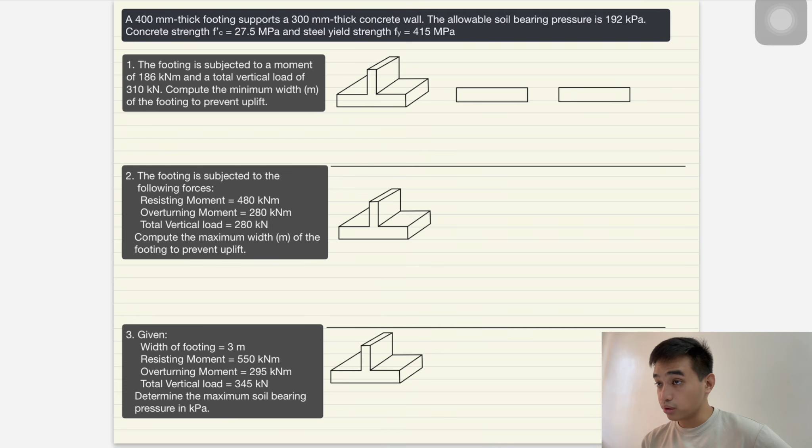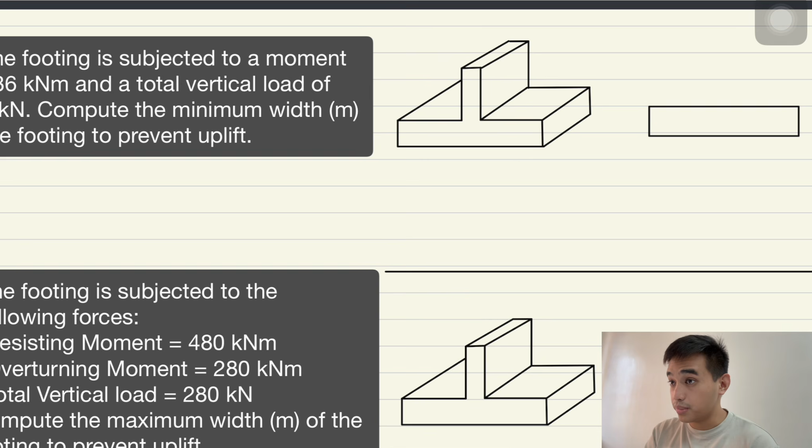So in our problem, uplift is mentioned. What is uplift? Uplift is when the pressure diagram under our footing exhibits tension forces. So how do we identify what our pressure diagram under the footing looks like?

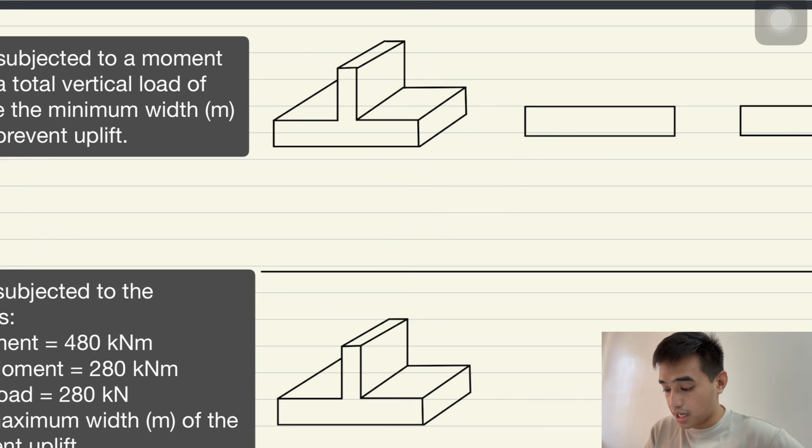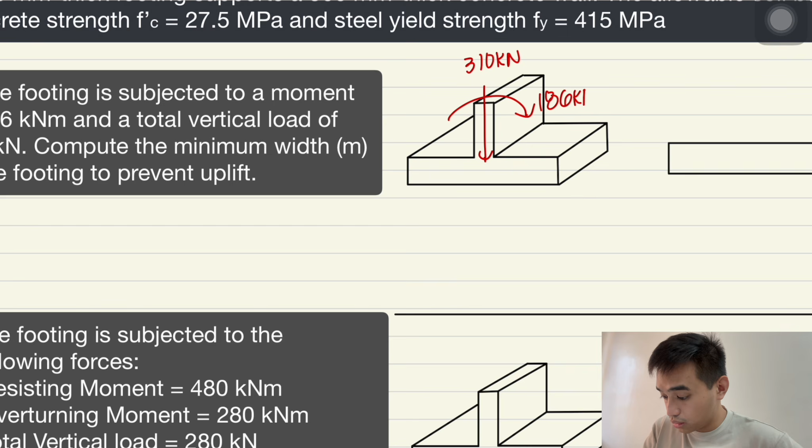Let's go through our problem one by one. We have 310 kilonewtons as total vertical load and our footing is subjected to a moment of 186 kilonewton meters. Let's try to see what our pressure diagram looks like for each of these forces.

For our vertical load, 310, since it is acting at the center of our footing, our pressure diagram will be uniformly distributed under our footing.

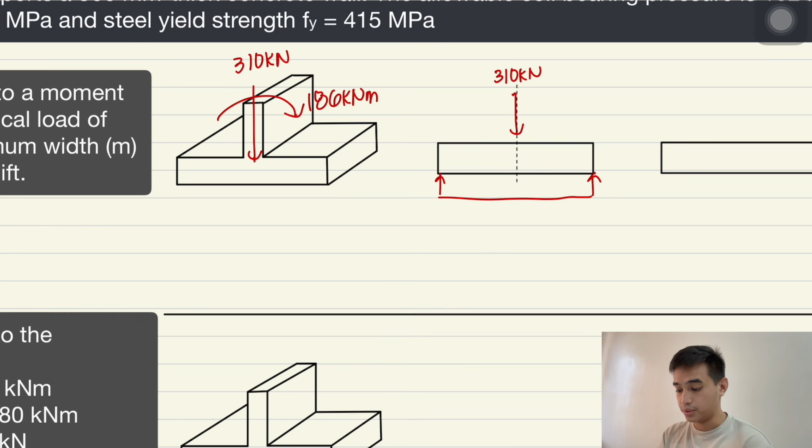Now for our moment, let's imagine, there's our moment, 186 kilonewton meters. When we imagine it, we look at the direction of our moment, our footing will tend to move like this, to rotate in such a manner. So we know that on this side of our footing, it gets compressed into the soil.

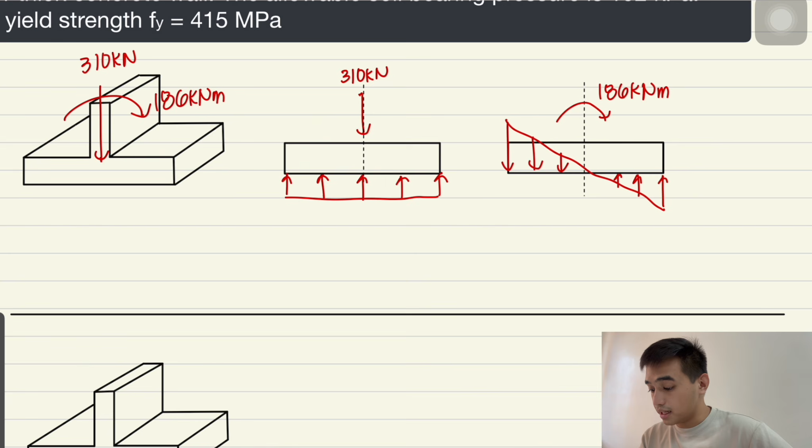However, if you can recall, our soil has very little resistance to tension forces. That's why we want no tension forces. And those tension forces are what we call uplift. So when our soil experiences uplift, it has tension forces, and that's what we want to prevent.

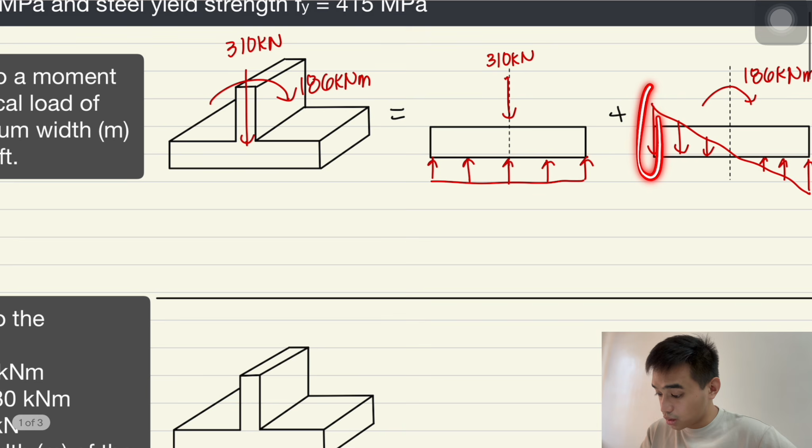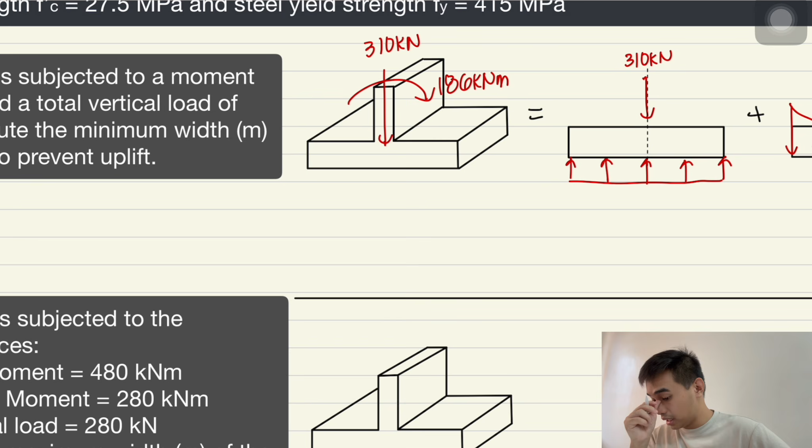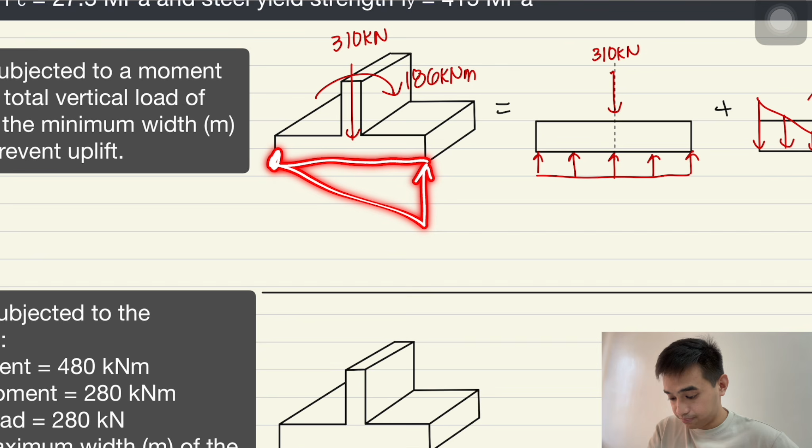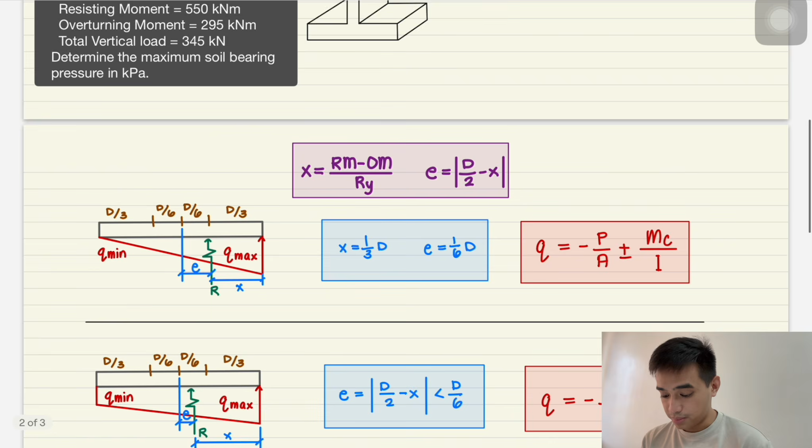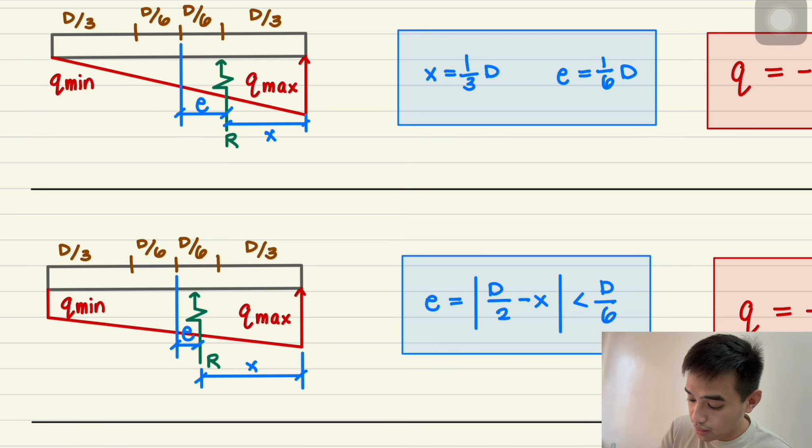In our pressure diagram, we know there's a resultant, R. That resultant of our pressure diagram is our total vertical load. It's always equal to our total vertical load.

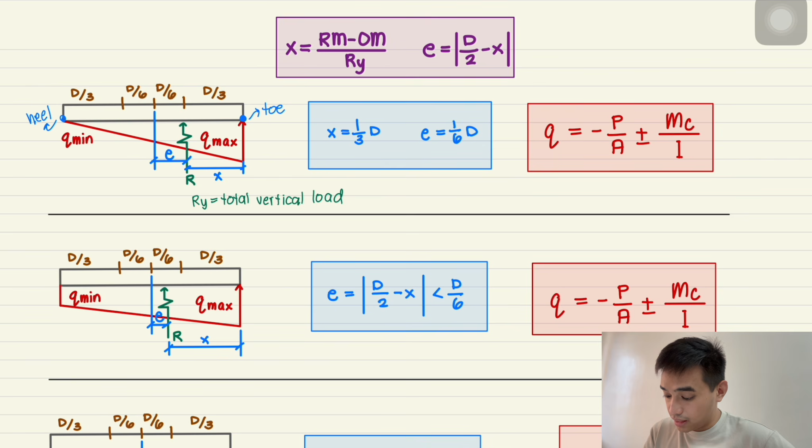So if our resultant has this condition, where x is 1/3 D or e is 1/6 D, then our load becomes triangular, and that becomes our solution for the pressures.

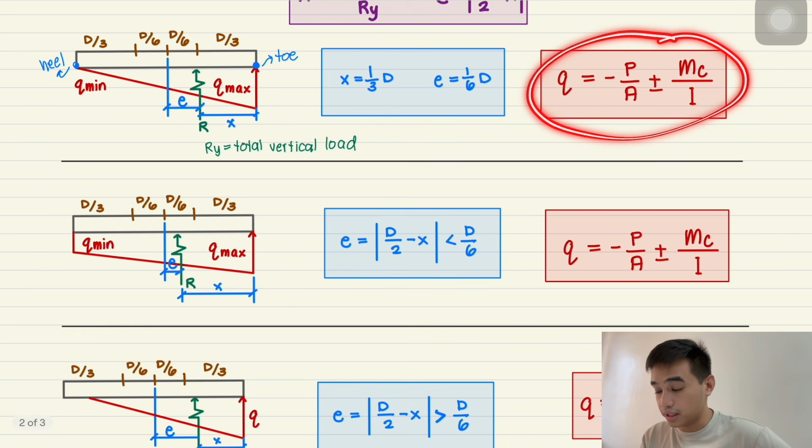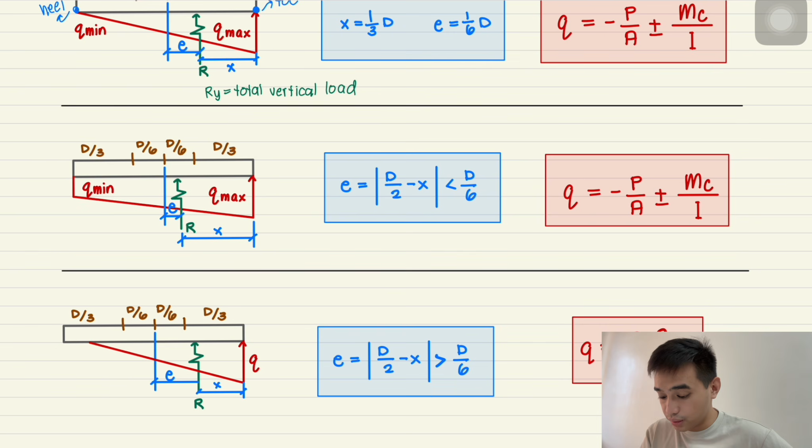If this is the condition of our distance x or E of the resultant of our pressure diagram, the pressure diagram will look like this. And if this is the condition instead, it will look like this.

And here we can see there's a part that we no longer consider because that's the uplift part, the one with tension forces. We negate that. This will be the formula for our pressure.

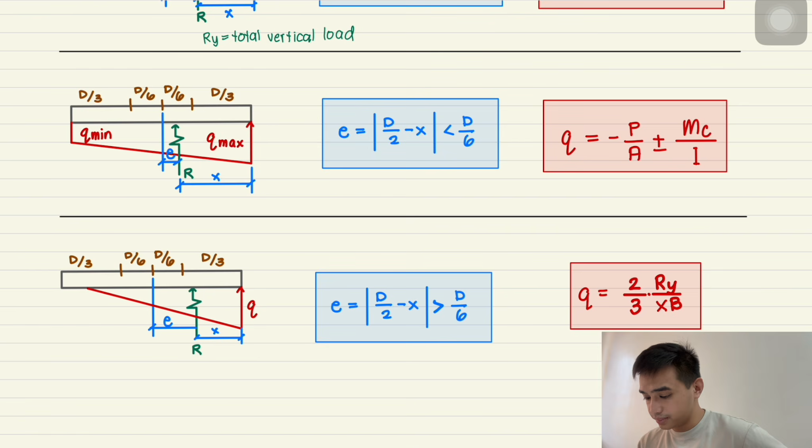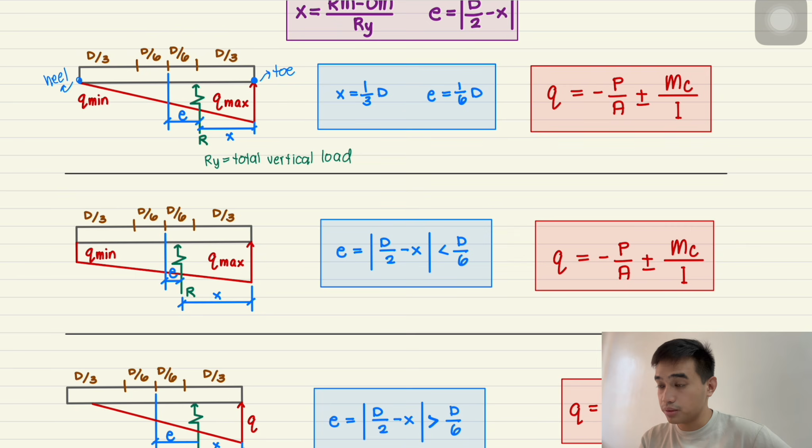So we can use this condition, or we can also use this one. For this problem, I'd like to use this condition as the formula we'll apply.

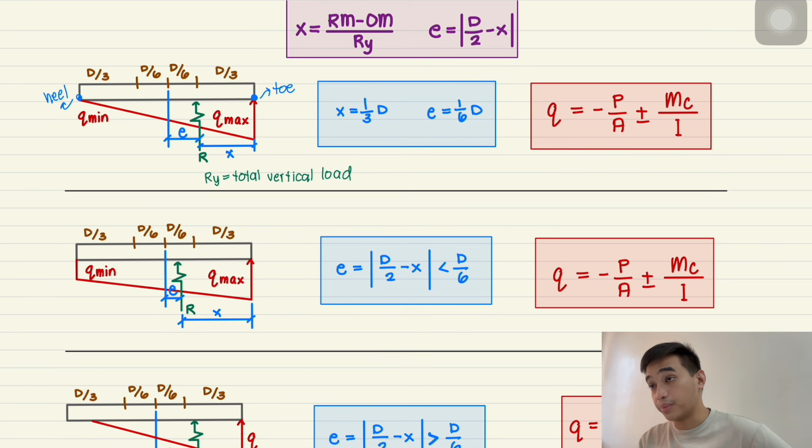If you can recall, this formula right here is just our combined axial and bending formula. Let's see it here. So that formula is, we just add this.

Itong dalawang side na to, equate natin siya to 0. So para mas ma-visualize natin, ayan. Itong part na to, yung pressure natin dyan, Q, gusto natin 0. At itong pressure dito, solution dyan is negative P over A. So negative for compression and positive for tension.

And ito naman, i-add natin siya. So of course, yung pressure natin dyan, it's bending. So flexural stress, MC over I. Ayan, ayusin ko lang.

So again, add natin yung dalawang pressure natin, for axial and for our bending, which is in tension. Ayan, na-set up na natin yung formula natin. So negative 310 kilonewtons over area.

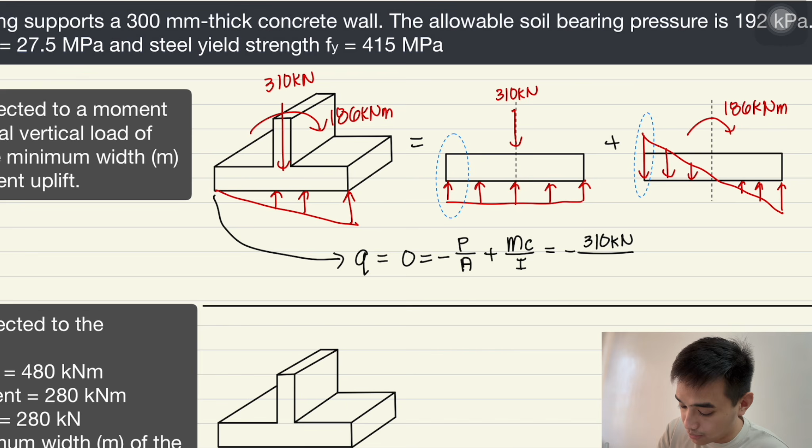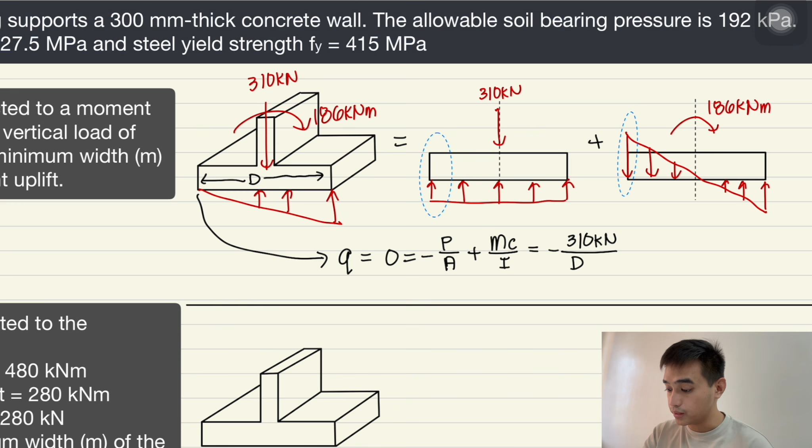Ano nga ba yung area natin? Yung hinahanap natin dito is yung width, no? Width, so D, gamitin nating letter D for our width. So area natin is D. At since wall ang ating pinag-uusapan sa ating footing, we can just consider 1 meter strip of a wall, so dito will be 1 meter. At add lang natin yung ditong pressure natin or stress, which is from MC over I na formula.

So ang ating M, 186 kilonewton meters. At C, which is the distance of that fiber na ina-analyze natin, ito, to our centroid. At makikita natin na itong distance na to is D over 2. So D over 2 over ang ating moment of inertia.

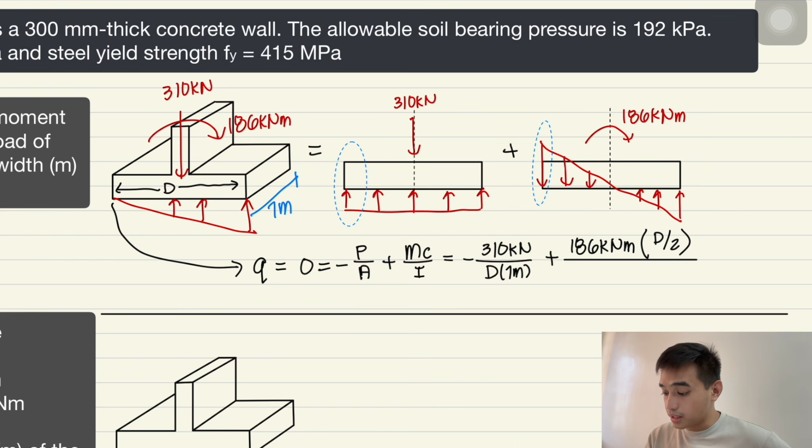Ang ating moment of inertia, so ako, para hindi ko nakakalimutan kung ano nga ba yung raised to 3, ang inaalala ko lang is yung naka-raised to 3 is yung nagre-resist ng ating moment. So makikita natin, ganito yung movement ng ating moment. At etong linya na to, yung gumagalaw, di ba? Etong dimension na to, yung nagro-rotate ng pagganon, ganyan. So para sa akin, yun yung kinoconsider ko na length na nagre-resist ng moment. Kaya yun yung raised to 3 ko.

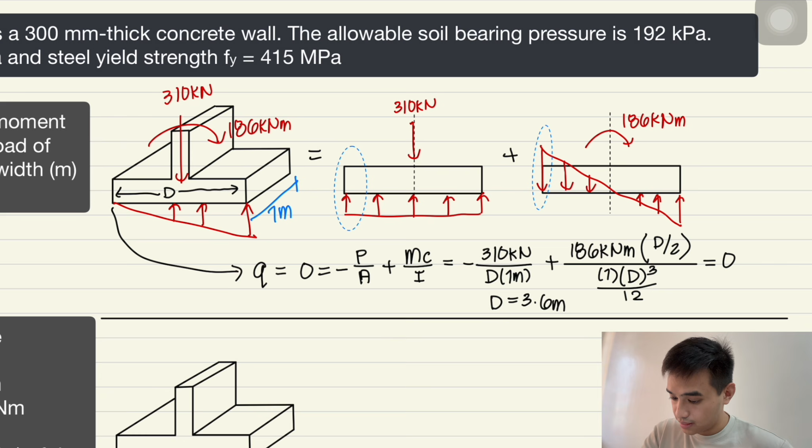So eto, yung length na to yung nagre-resist. So that's actually the D or the minimum width na sinasolve natin, over 12. At kapag in-equate natin to 0, kasi nga gusto natin ma-prevent yung uplift, ang makukuha nating D is 3.6 meters. Ayan, 3.6 meters. So that's it for our first problem.

Next naman, for number 2, the footing is subjected to the following forces. Resisting moment equals to 480 kilonewton meters. Overturning moment equals to 280 kilonewton meters. Total vertical load of 280 kilonewtons. So we have to compute the maximum width of the footing to prevent uplift.

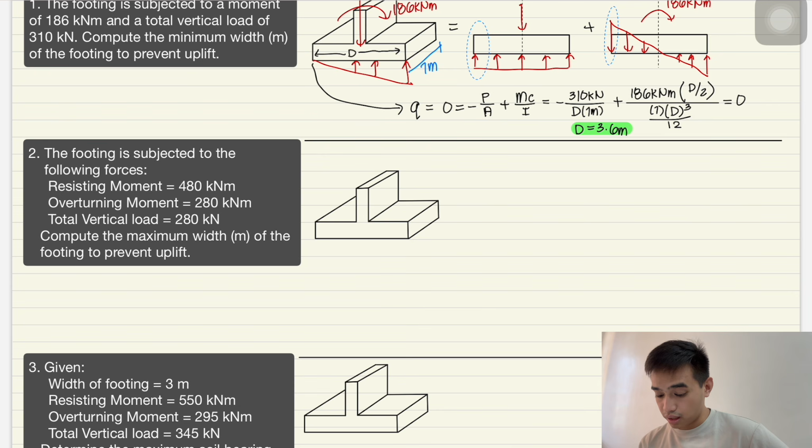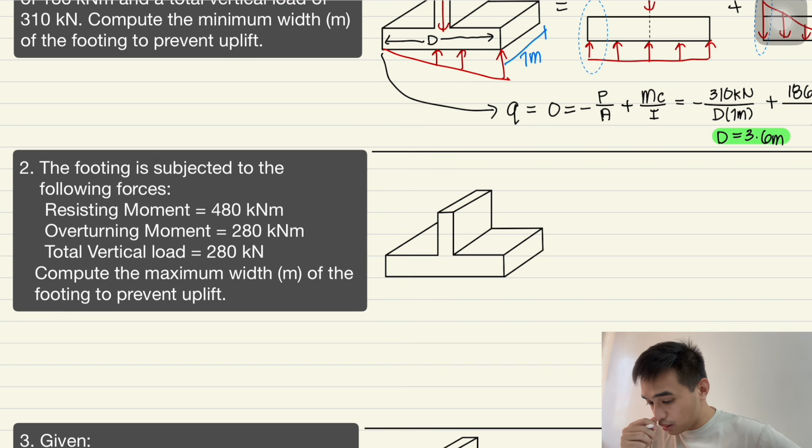So dito, may binigay na sa ating mga terms na resisting moment at saka overturning moment. Ano nga ba yun, no? Ano nga ba yung mga moment na nagre-resist at ano nga ba yung moment na nag-overturn? So usually sa mga problems natin, siguro yung mga common sa inyo, ganito yung mga mukha ng mga given sa atin, no? Meron tayong vertical load for weight ng concrete, meron tayong vertical load ng weight ng ating soil, o siguro kung ano pa mga applied loads dyan ng ating column.

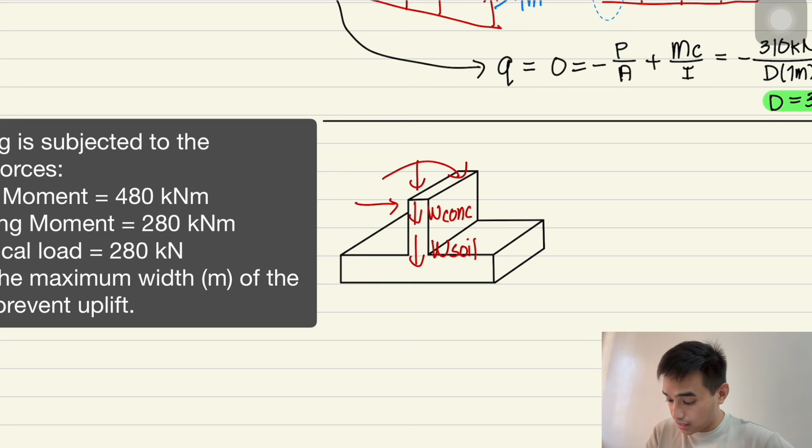Usually, meron din tayong mga moment, tulad dito sa first problem natin. At at some cases, may binibigay rin sa ating mga horizontal loads. So para malaman natin kung ano ba yung resisting moment, kung ano ba yung overturning moment, usually nag-identify tayo ng ating toe at ng ating heel. So parang sa ating mga dam analysis.

So more on that in other problems, but here, gusto ko siyang i-identify toe at saka heel. Yung toe usually yung nagsistay sa ground, yung heel yung posibleng umangat. So malalaman ko kaagad kung ano yung overturning moment. Yung mga overturning moment natin is itong H tsaka M.

So yung H na to tsaka yung M na to, pagka kinuha natin yung moment with respect to this point sa toe natin, may imagine natin na yung movement ng ating footing is ganito, di ba? Ayan, so inaangat niya yung heel, yung mga forces na to. In other words, ino-overturn niya yung heel. Tinataas niya. Ayaw nga nating tumataas yung ating footing o nawawala siya sa contact with our soil kasi nagkakaroon ng uplift o nagkakaroon ng tension forces. So lahat ng mga forces na inaangat yung heel natin, ayan, o linalayo siya sa soil natin, will be our overturning moment.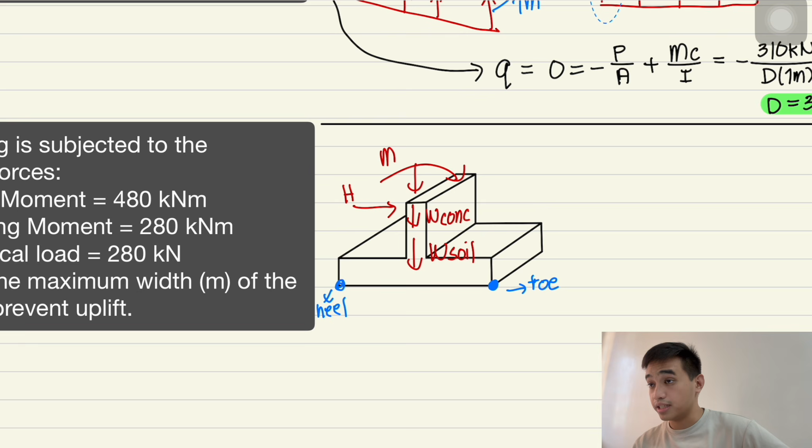At syempre, yung mga vertical loads na to, with respect dito, makikita natin yung mga, kuwari, yung moment arm nila, eto, no? Kung yan yung moment arm, makita natin yung moment nila, binabalik yung heel sa soil o kino-compress yung heel sa soil. Yun yung gusto natin kasi our soil mainly resists compression forces. Yun yung way para malaman natin kung ano ba yung resisting moment and overturning moment.

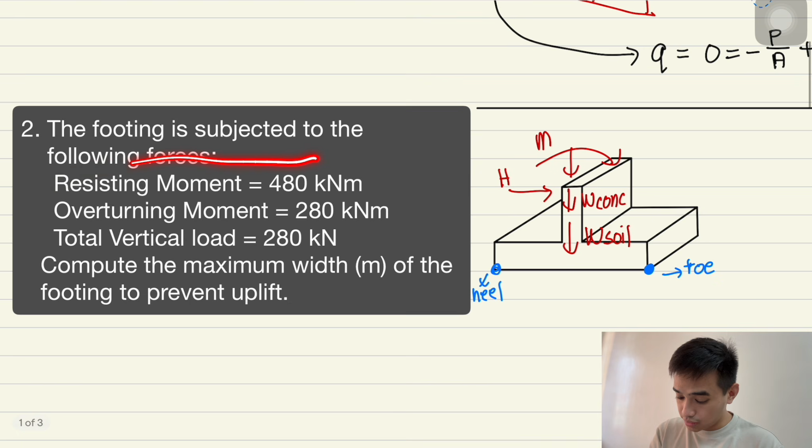But for this problem, no, given naman na lahat, given na sa atin yung na-solve na, yung resisting moment at this point, tsaka overturning.

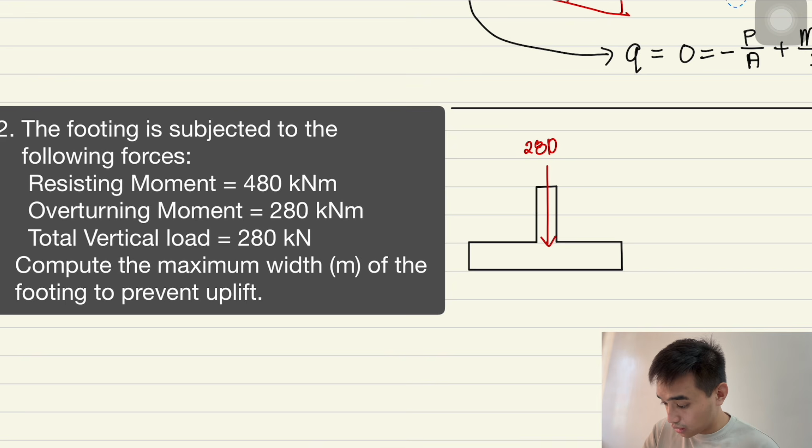So, let's place them. Let me remove this to make the drawing easier. Given: total vertical load is 280 kilonewtons, resisting moment is 480 kilonewton-meters, and our overturning moment is 280 kilonewton-meters.

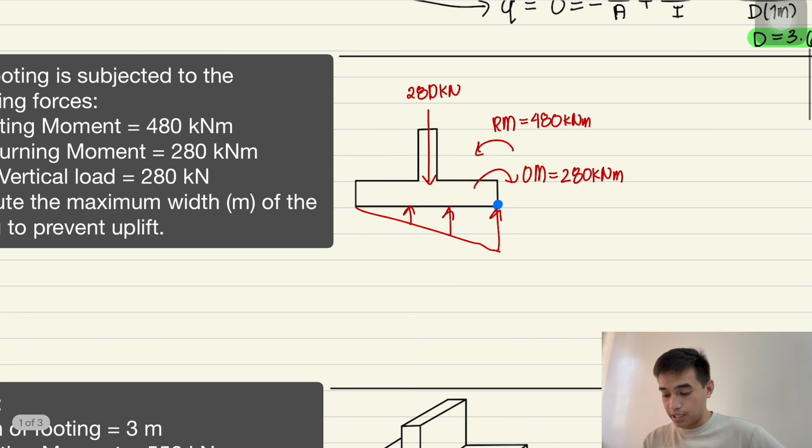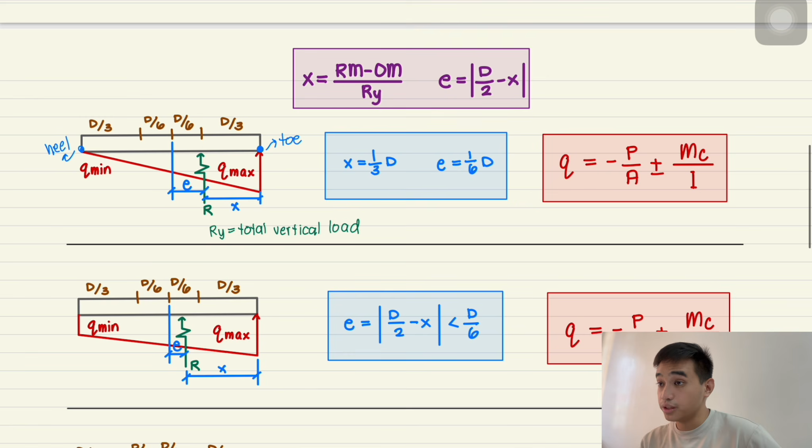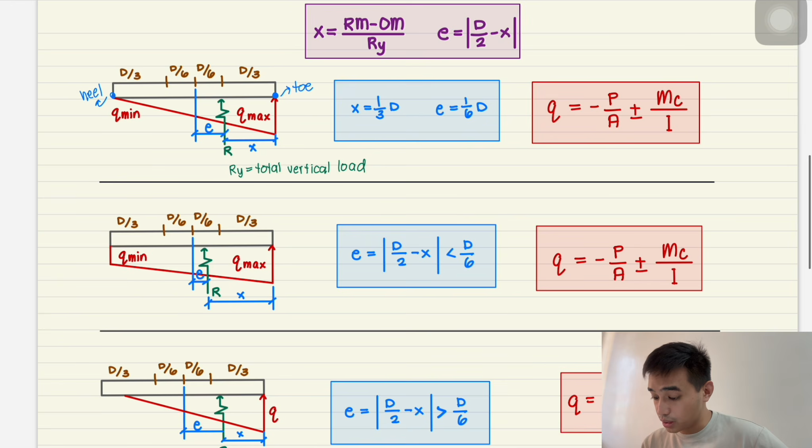All of these are easy to derive yourself, so you can search for it, but I won't tackle that in this video. What we want to aim for is this: we want our x, the distance of the resultant, to be 1/3 d, or the eccentricity to be 1/6 d. So we start with this formula.

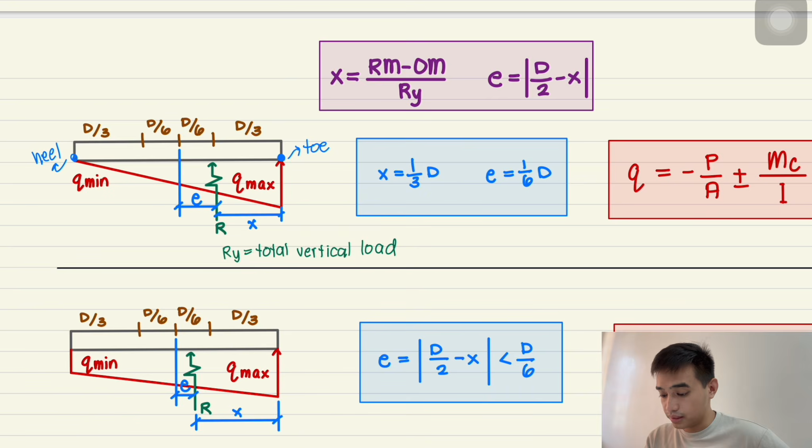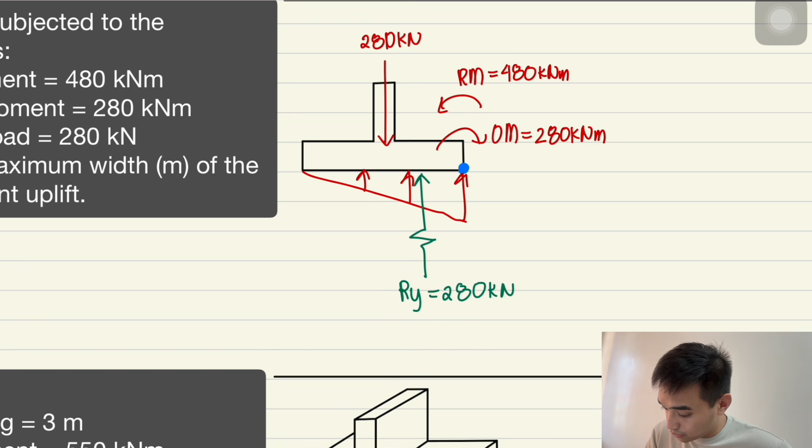We want the resultant of our pressure diagram, Ry, which again equals our total vertical load. Given that, we want the distance x to satisfy the condition that it should be 1/3 d. And the formula for our x is resisting moment minus overturning moment, over Ry. So we equate it to 1/3 d and set up our formula.

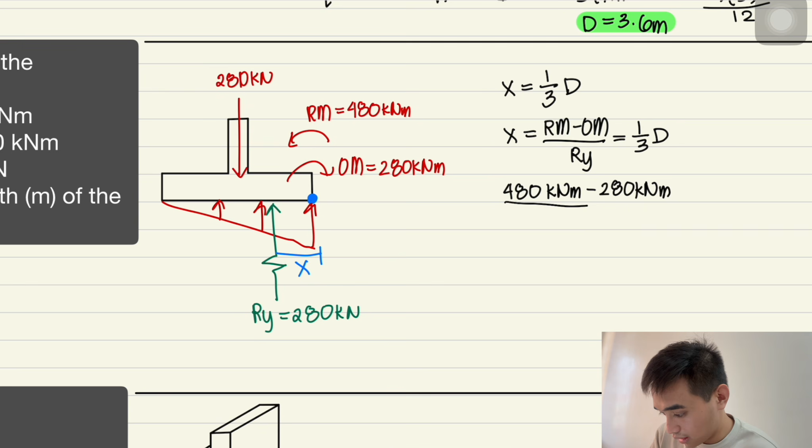Our resisting moment is 480, minus 280, and our total vertical load is 280 kilonewtons, and we want this equal to 1/3 d. So our d will be 2.143 meters.

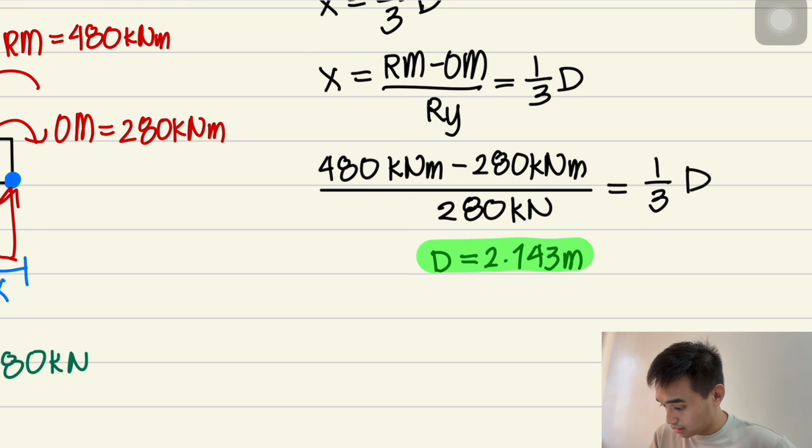Next problem: given width of the footing is 3 meters, resisting moment is given again as 550 kilonewton-meters, and our overturning moment is 295 kilonewton-meters. Our total vertical load is 345 kilonewtons. Now we have to determine the maximum soil bearing pressure in kilopascals.

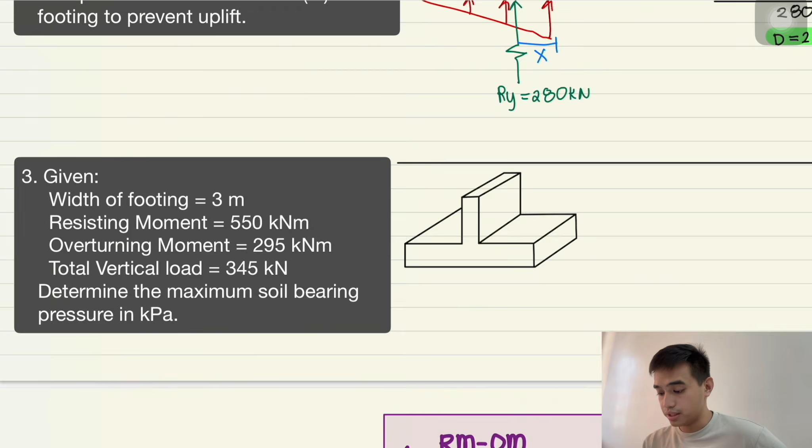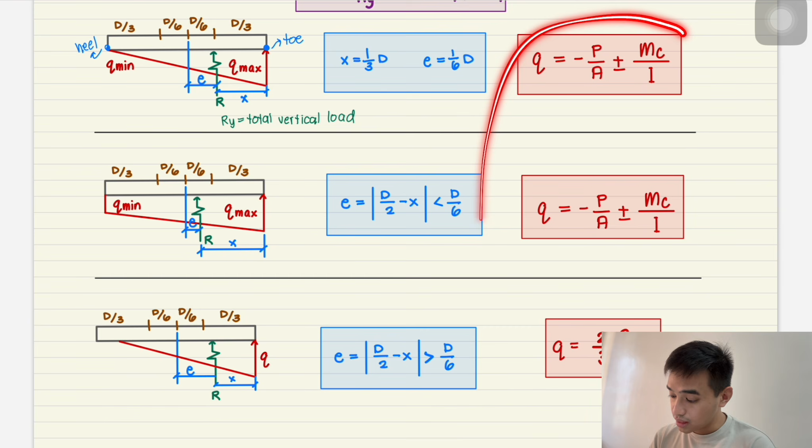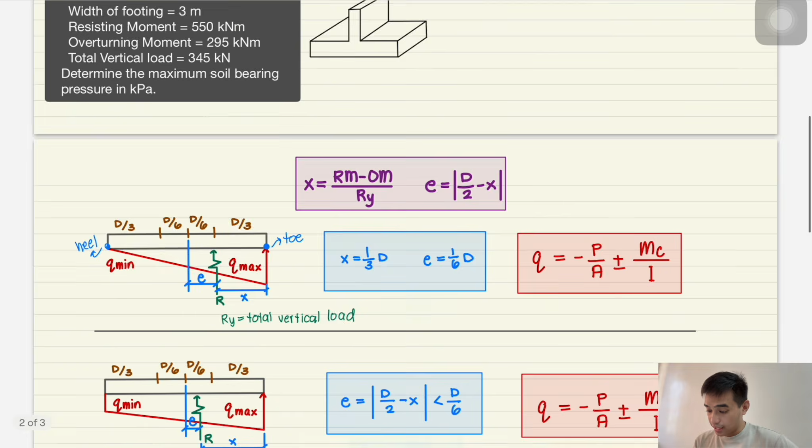Earlier, we were always solving for the dimension, but this time we focus on the values of Q. The main trick here is identifying which pressure diagram applies, because the solution for Q changes. Like earlier with uplift, that becomes the formula for our pressure. So let's identify which case, or where the location of our resultant is.

For this problem, we have a 345 kilonewton vertical load. Our overturning moment equals 295 kilonewton-meters, and our resisting moment is 550 kilonewton-meters. I don't yet know which case our pressure diagram takes, so let me place the resultant of the pressure diagram, which is 345 kilonewtons, always equal to the total vertical load.

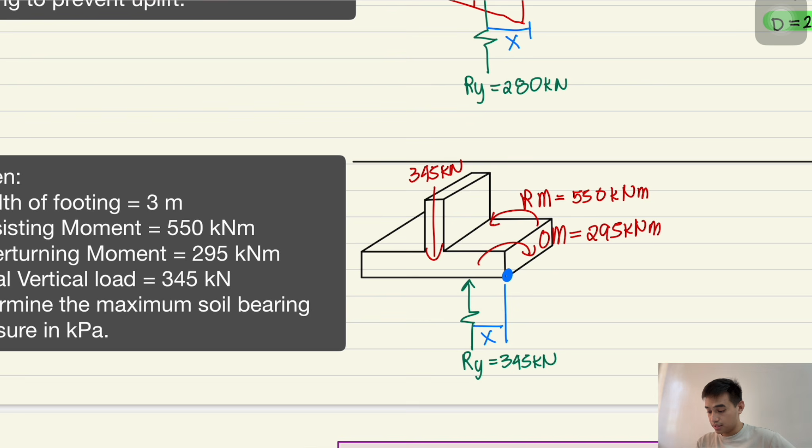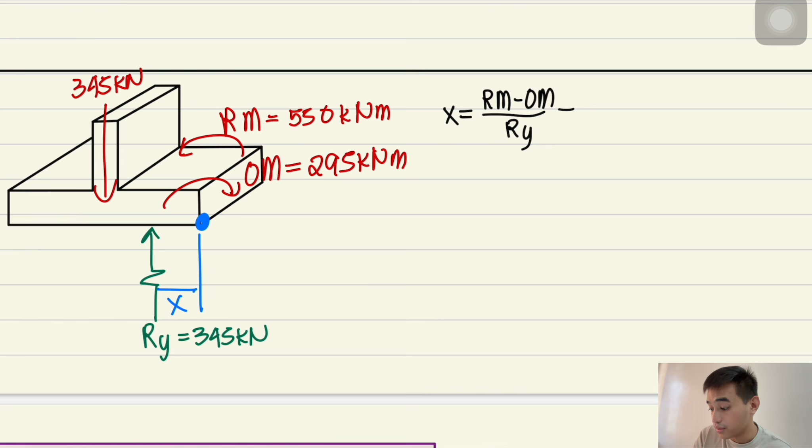To determine which case the pressure diagram takes, we just solve for x, its distance relative to the center for our eccentricity, and x relative to the toe. So again we go back to our formula: x equals Rm minus Om over Ry. The resisting moment given is 550, overturning is 295, and our total vertical load is 345. This gives us 0.739 meters.

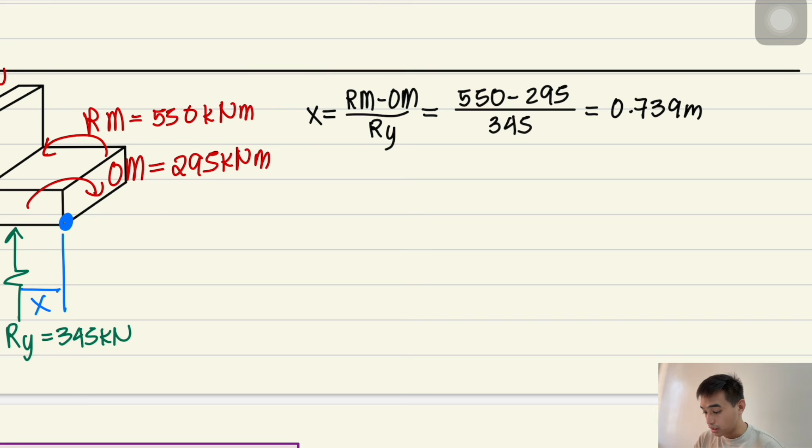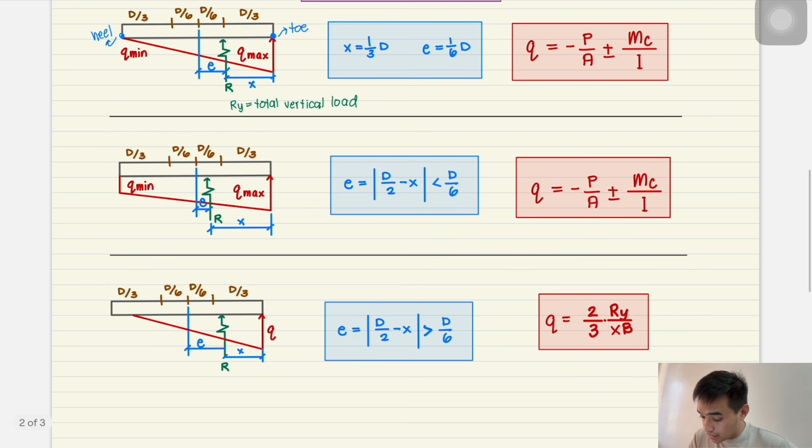Now let's compare it to E. If our E is 1 over 6D, the pressure diagram is triangular. But if our E is less than D over 6, the pressure diagram becomes trapezoidal. And if it exceeds D over 6, the pressure diagram looks like this, with uplift, so we no longer consider the tension part of the pressure diagram.

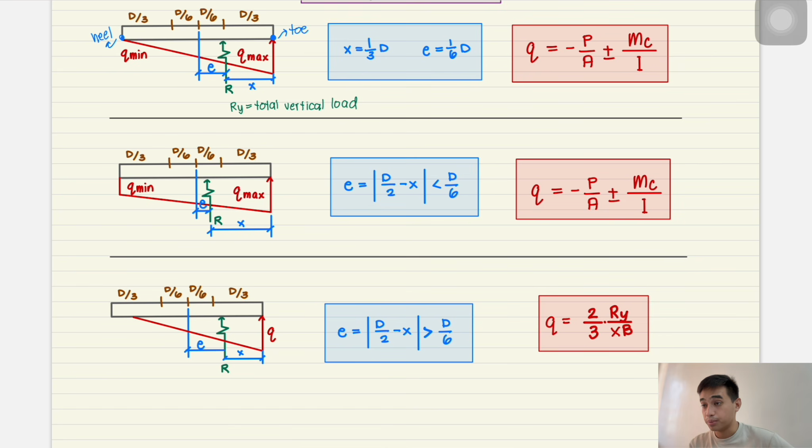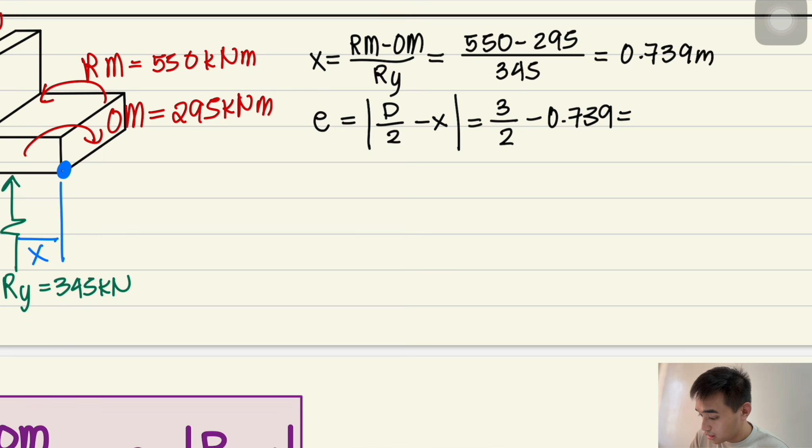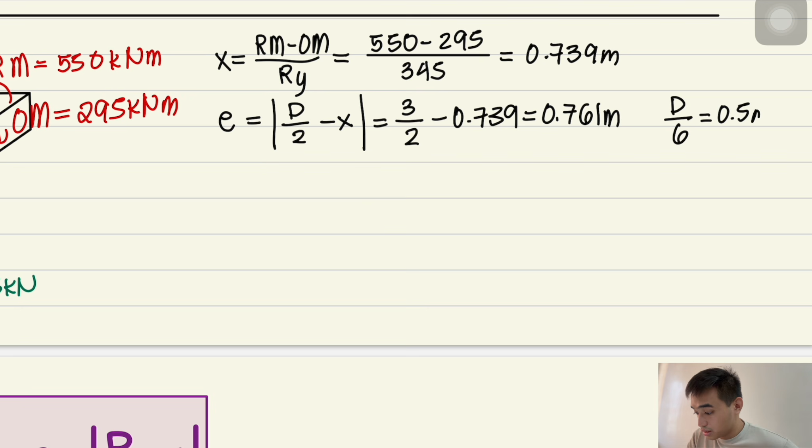Our E equals the absolute value of D over 2 minus X. With D given and X equal to 0.739, this gives us 0.761 meters. Let's compare it to D over 6. Our D is 3, so 3 over 6 is 0.5 meters. Our E is larger than D over 6.

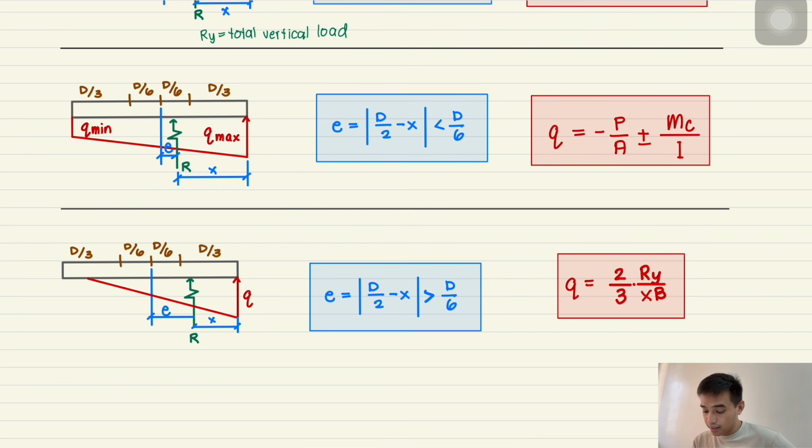So based on our conditions, this is where we fall, this is where we land. We'll use this formula to solve what's asked in the problem. Our Q, once again, is easy to derive yourself - you can check it, it's just mechanics. It's 2/3 of Ry over X times B, where B is our width.

Since this is a wall footing, we can consider a 1 meter strip of footing. So 2/3 times Ry, which is 345, over X which we solved as 0.739, considering a 1 meter strip of footing, gives us Q max of 311.231 kilopascals. That ends our problem for our footing.

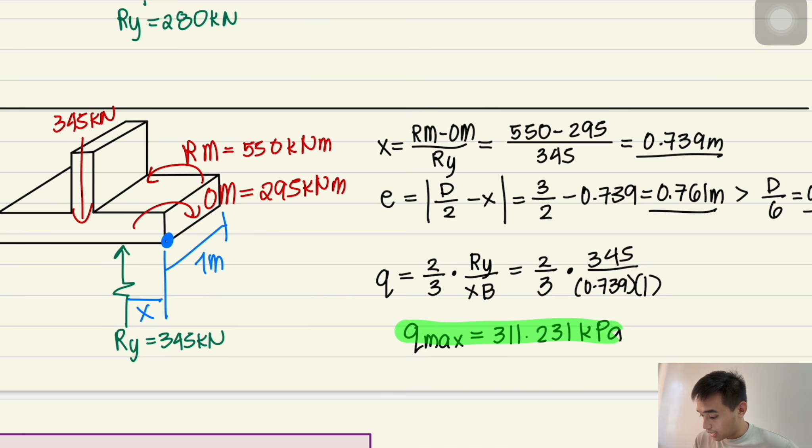So we can take a picture of this so you have notes for the different conditions and different pressure diagrams of our footing. That's it, thank you.